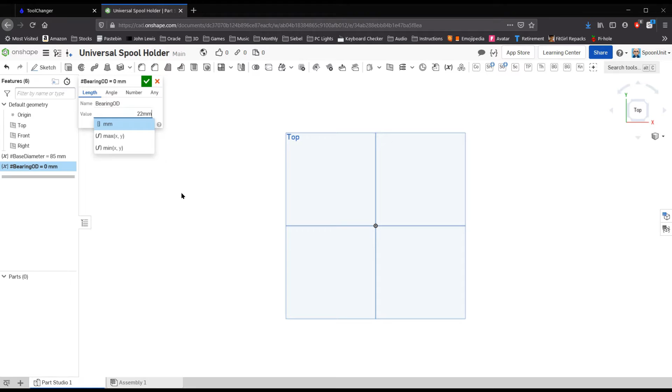And pretty much everything else should flow from that. Let's see how we get on.

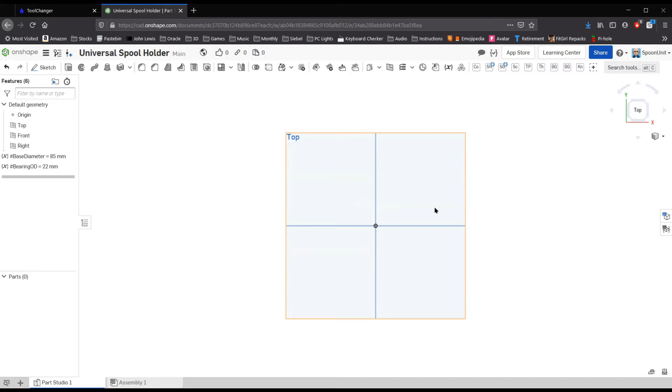Okay, so the first thing I've done is rotate the model, the 3D space, so that we're looking at the top. I can click on the top, press N to normalize to be looking directly down on the top. I'm going to create a sketch here in the top plane, and we'll start by creating a circle.

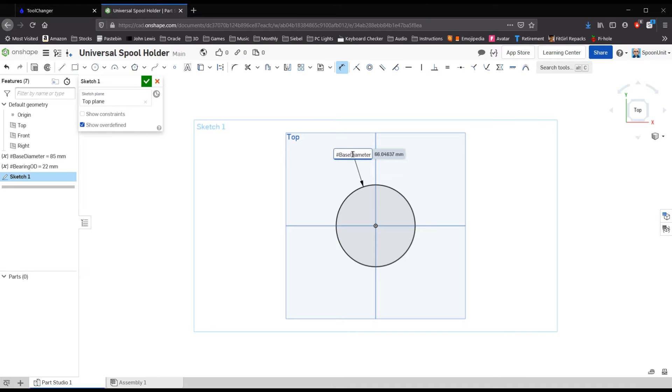I'm going to type in for that - in fact, I'm going to pick up the dimension, click to make this a dimension, and make this to be a variable, and I'm going to pick the base diameter. Okay, so now that gives me something which is 85 millimeters in size.

And what you'll see here is that if I change that size, if I increase it, using the arrow keys, this thing will actually grow. It's very easy to adjust that size at any stage in the design, or later if you print out this design and figure out that it's not quite right.

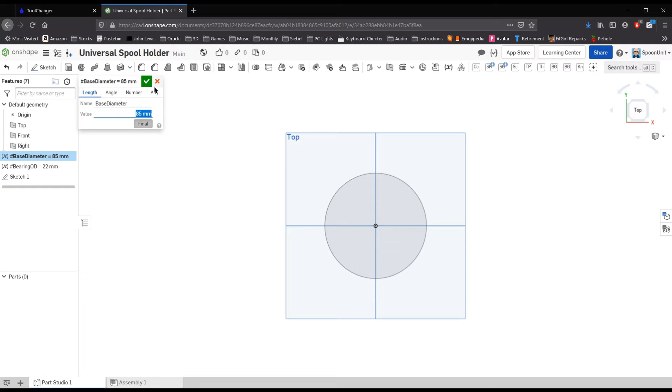I'm also going to have a slight - what's the word for it? We're going to extrude this circle and then chamfer the edge of it in order to give us a profile which can fit multiple spool sizes.

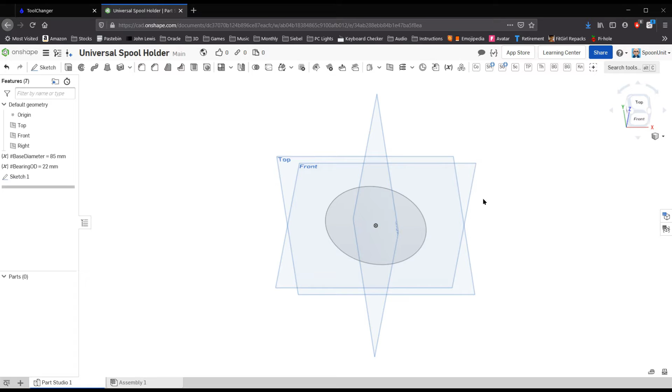So I'm going to pick that sketch, and use the extrude tool, and we'll just start by extruding this, say 15 millimeters. You'll see what I'm doing in a minute with this.

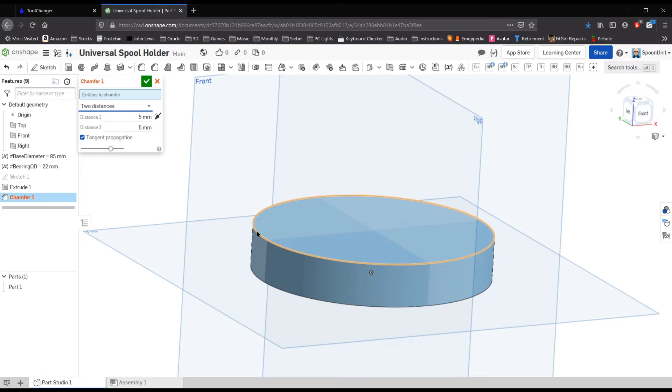I'm then going to shave some of the top off this using the chamfer tool, just to give it a bit of a nice look, essentially. We can do two different distances here. So I'm going to chamfer this edge, and right now that's just using 5 each. We can again use the arrow keys to increase the numbers until we get the sort of design that we're looking for.

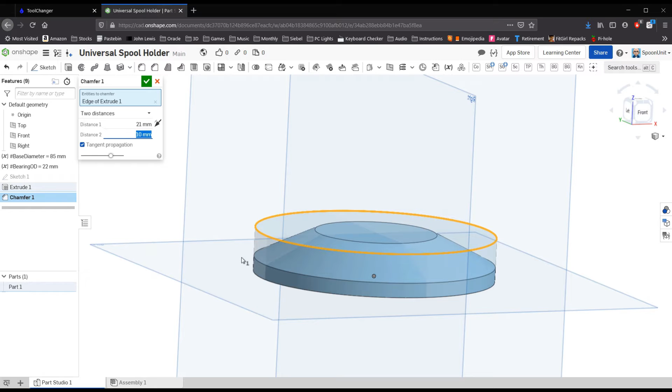We can tweak this a bit further at a later stage. Let's go for something like that, and then I'm going to create an additional chamfer on the edge, just to make it look nice. So we'll chamfer this, create again two different distances, and we'll go for something like that, say.

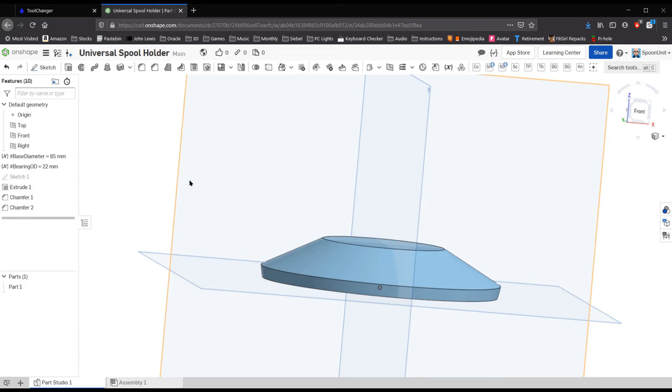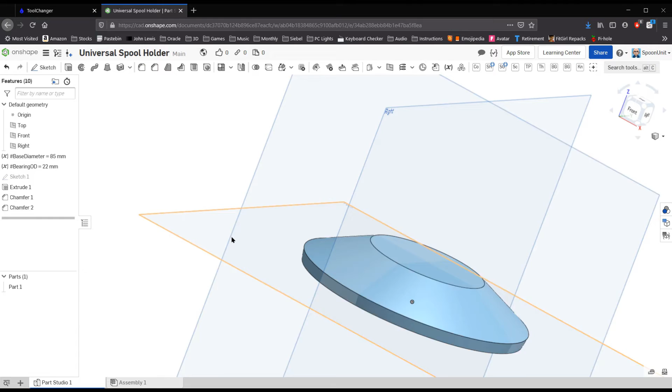So that just gives us something to hold on to, and which will allow us to screw this in until it fits on the inner diameter or the outer diameter of the hole inside the center of the spool. I could model that as well, but I'll forget that for a minute.

Okay, so from here then, the next thing we need to think about - I'm going to click this surface and create a sketch on there. The next thing to think about is the fact that we're going to have a bearing. Now most bearings, as I say, we use a skateboard bearing, that's 22 millimeters.

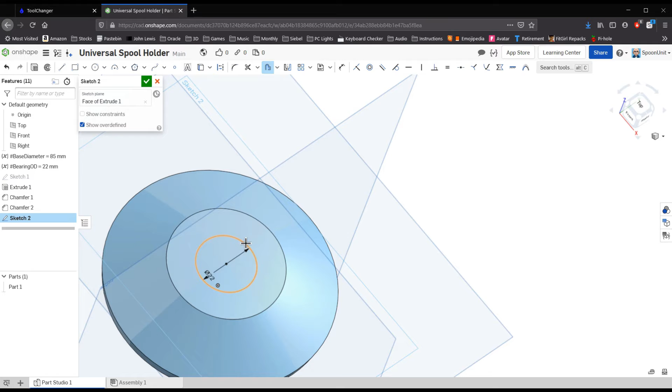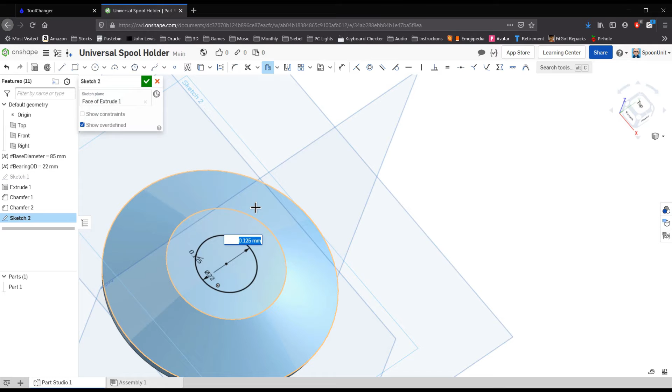I'm going to add a bit of size to this using this offset tool, because if it's 22 millimeters, I don't want to make it exactly 22 millimeters, or when it prints it won't quite fit. So I'm going to add 0.15, or let's say 0.125 all the way around, just to allow the bearing to be easily inserted.

As I say, if I make it 22, I'll probably end up having to get sandpaper and square it away. I've found through experience that you need to make the hole a little bit bigger than the thing you're trying to fit. I generally recommend 0.3 if you want something to fit inside, but we want quite a tight fit, so I'm going to go for 0.25, and if I add 0.125 each side, that's going to give me my 0.25.

Hopefully that wasn't too difficult to follow.

On top of that we're going to create some extra offset in order to create a rod that we could thread. So on top of that, let's say we add 3 mil.

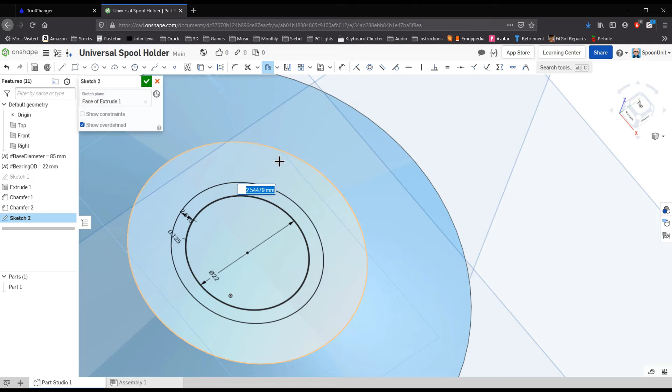And then I'm going to take this and we're going to extrude this. Now the question is, how thick is my spool? Bear in mind, the spool is not going to touch this base here. It's going to touch somewhere along here depending upon the size of the spool. So thinking about that is going to control how much we need to extrude this.

I'm going to say 100 mil. You can adjust this again.

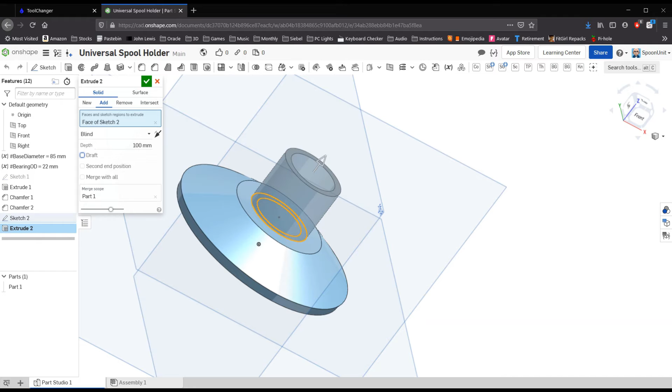There's another thing that we could actually create a variable for, called reel width. Let's say I'm going to put that one as 100 mil. If I move this variable up, then I'll be able to use that here. So instead of saying 100 mil, I can change that to hash reel width.

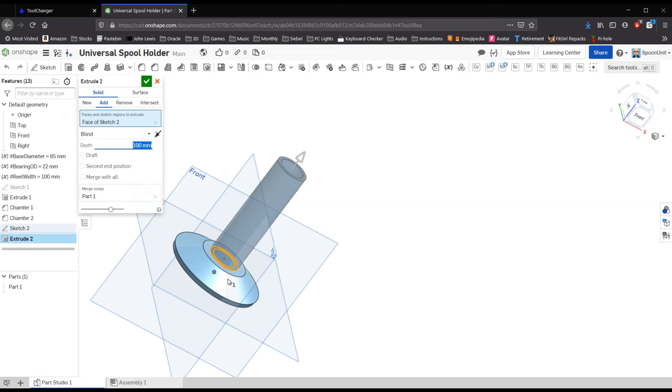Now, if I want to adjust my design, I can make this shorter or longer. Very easy to do. Take that back up to 100.

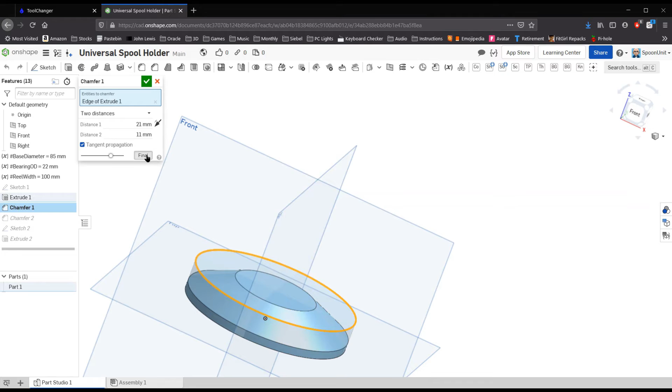You can see now we could adjust that chamfer a little bit further here to butt this up to that edge.

And at some point it's going to get difficult to make that. That looks as if that's about spot on.

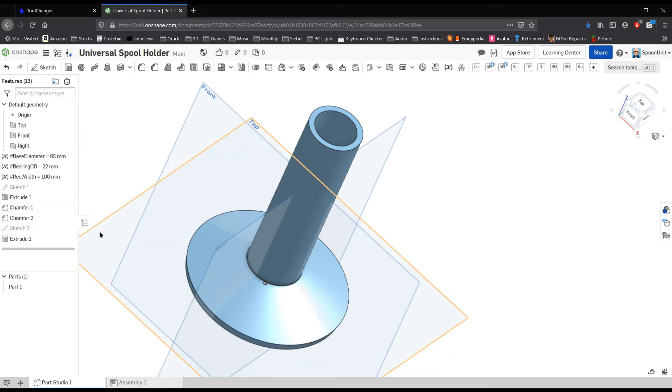So the next thing we want to do is add a thread to this. Now you can do that from first principles, or you can pick up some tools.

You can add some custom features here, and search for thread. We'll probably find a threading feature.

There are a few different ones that different people have designed. I've already picked one here, called Thread Creator. I'm going to click that, and it asks which face to thread — it's this outside edge that I want to thread. So I just click that cylinder and it will thread it for me.

Just takes a moment. This is all being done in the cloud somewhere on Onshape's servers. Not being very quick at all. I wonder why.

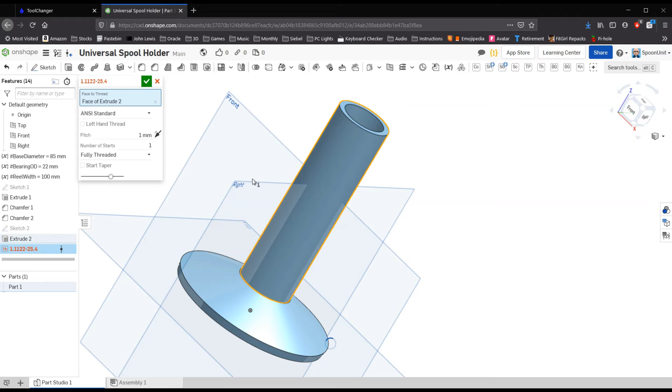Okay, there you go. You can see we've got our thread, and that's just too fine. We don't need a thread that fine. It would take forever to wind our bolt or our nut onto this bolt.

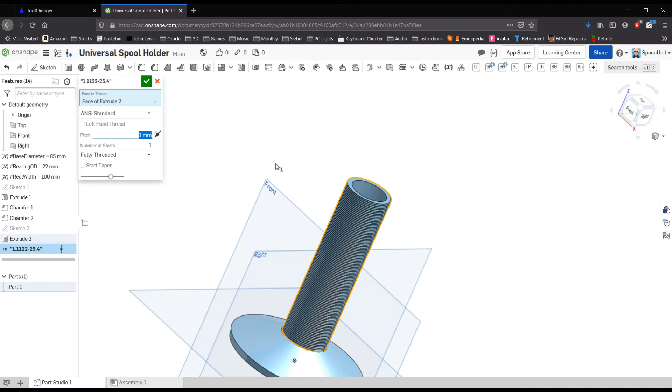So I'm actually going to change the pitch to 4mm, and that will then change this to be something that'll be a bit easier to use and a bit easier to print.

You could even change this further. We could go for 8, for example, but as you can see, that's had an unexpected effect where it's actually created a requirement to make the thread that has got rid of the interior, which is definitely not what we want.

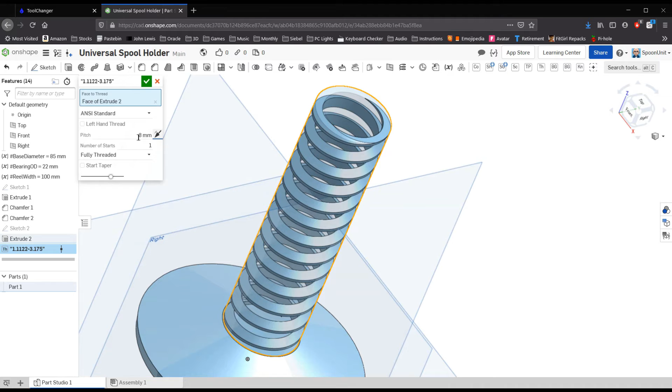What about if we did 6? No, 6 is no good. 5? Yep, 5 would allow us to keep the interior, but it's probably extremely thin between these inner parts and this.

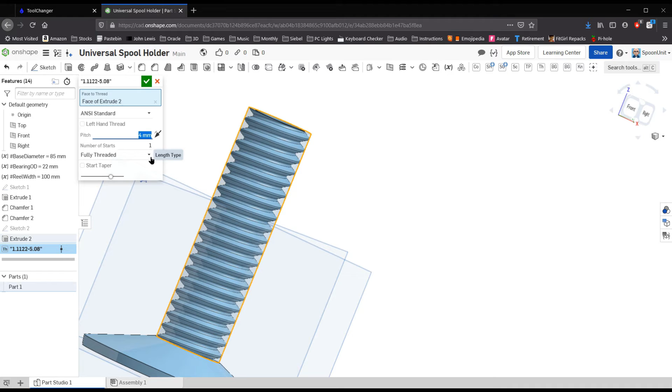So we'd have to again adjust our design if we wanted even larger threads. I'll stick that back to 4, as I'm pretty sure that'll work well.

We could increase the number of starts here as well. That would again adjust the design somewhat and would make it probably do up rather quicker.

I'll just leave it at 1. You can play with that if you want.

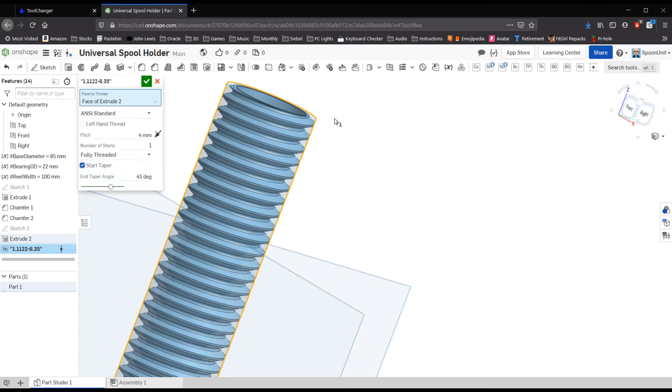The other thing we can do here, which is interesting, is a start taper. Now you can see here that's just had an effect at the top, and that can also make it easier to actually thread this thing.

I've used a 45-degree angle. Let's change this to 60. And let's just cut a little bit further off the top of that, and that'll make it even easier to push in.

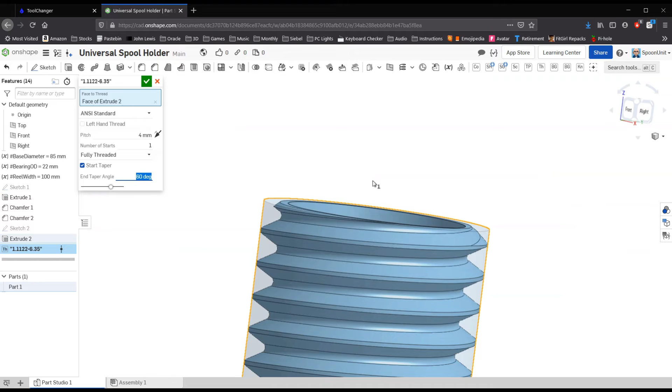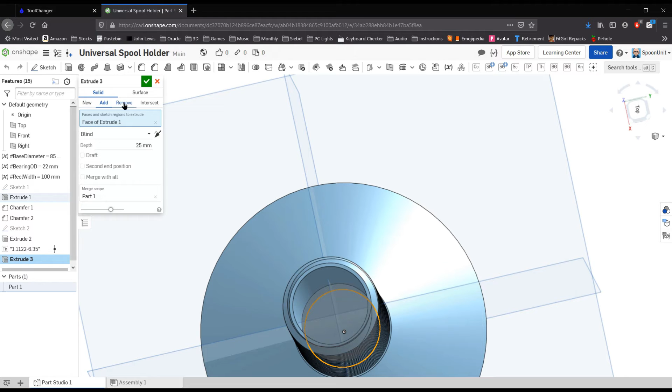Okay, so that's that part. It should be easy to push our bearing in. Now you can see we've got a little problem here. We're not going to be able to get our bearing in the bottom. So what I'm going to do here is just select that hole at the bottom, and we'll extrude, but a remove sort of extrude instead of an additive extrude. Click OK, and that's it. We've now got a hole in the bottom.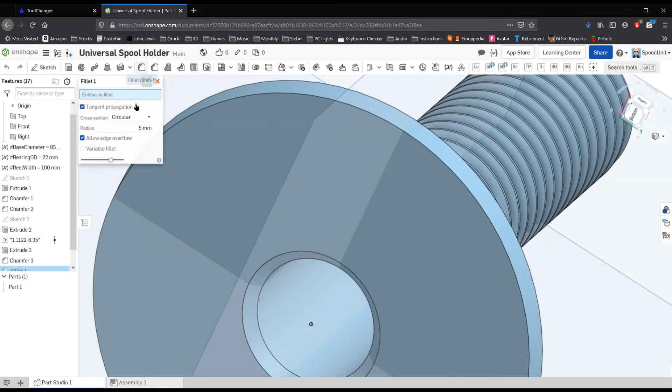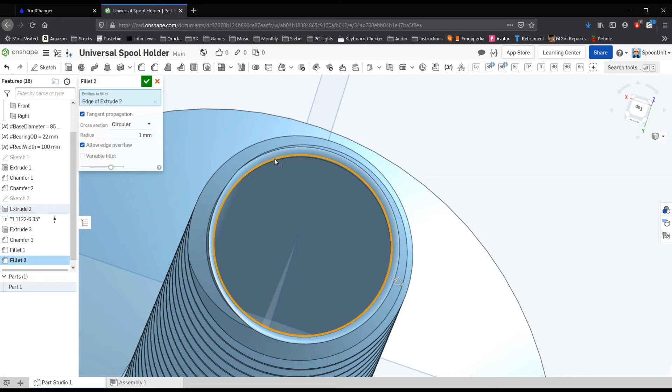And again, if we just modify that, I'm going to add, say, 2mm chamfer in here. That'll make it a little bit easier. And in fact, on top of that, I think I'm going to add a 5mm fillet, just to allow us to push in our bearing relatively easily. We could do that at the top too, but I suspect we're going to begin to have a bit of trouble if we start filleting this. I'll just try adding a 1mm fillet here. Oh yeah, it will let me do that.

Right. Okay, so we've got all that parameterized modeling in. We can just modify any of this now to adjust any of this. So if we want to change that base diameter, I can click on this, look at my final model, and I'm going to increase that base, and it will just adapt the whole model for that adjusted base size. If I want to make it 100, no problem.

Easy. You can see some of the modeling doesn't quite follow exactly. We'd have to go and adjust some of the chamfering. You can go a bit crazy with adding variables, but this will still work nicely. I think we originally had that at 85, so let's go back to where we were.

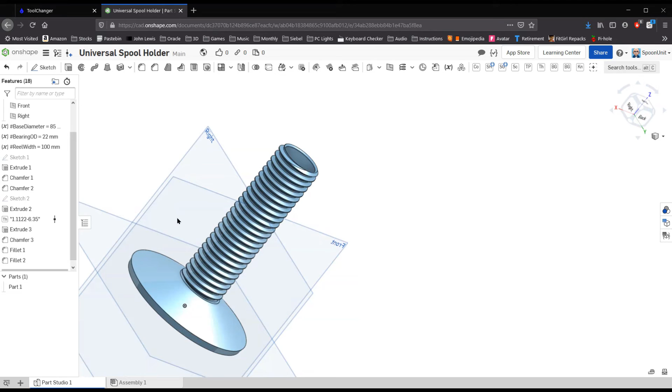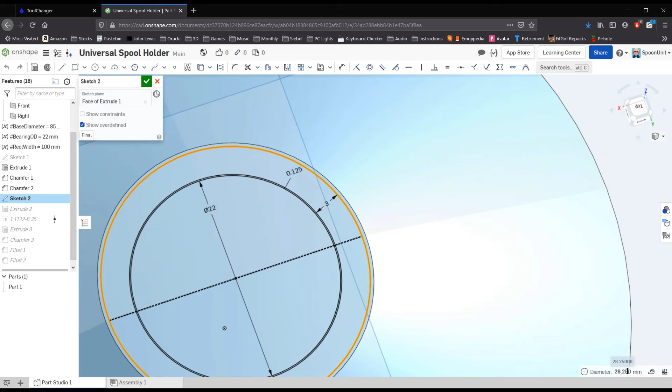Okay, so that's the one side of the puzzle. Now we need to solve the other side of the puzzle. And before we get started with that, I'm going to come back to my sketch where we defined what the outer diameter would finally be of our thread. So if I click here, we can see it tells us that the final diameter outside was 28.25.

So we will want our nut to be 29.25 or 29.75 in order to give it a bit of an easy time threading on. If we make it the same size, again, the nature of printing is that the numbers aren't always accurate and you need a bit of freedom to rotate your nut on the bolt.

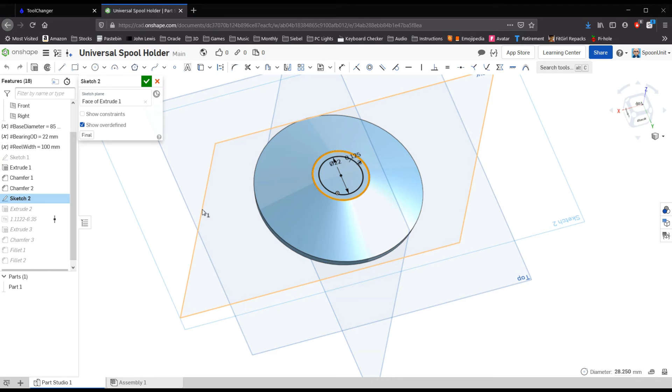So our size would be 28.25. We actually could have calculated that too from here, given that we knew what we would add to it. The 22 plus the 0.125 plus the 3. Well, actually that would have been 22 plus 2 times 3 plus 2 times 0.125 in order to get all the way to the outer diameter. Could have all been parameterized, but that's going too far.

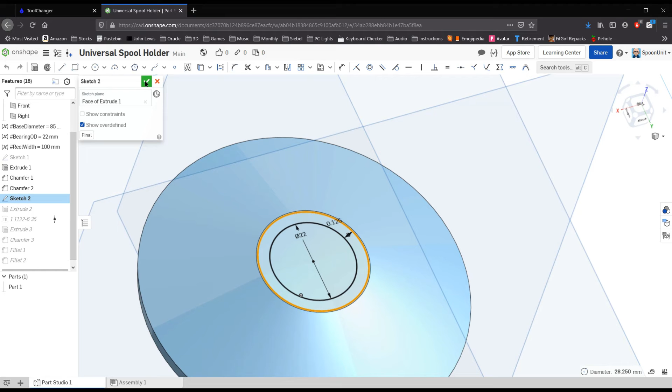Okay, so let's say we're going to add 1.5 mil of free space, so we need to create our second piece. Now we can do that in a new part studio. It's the easiest way to do it, really. So that's our bolt. Let's rename that to bolt, and we'll rename our new part to nut.

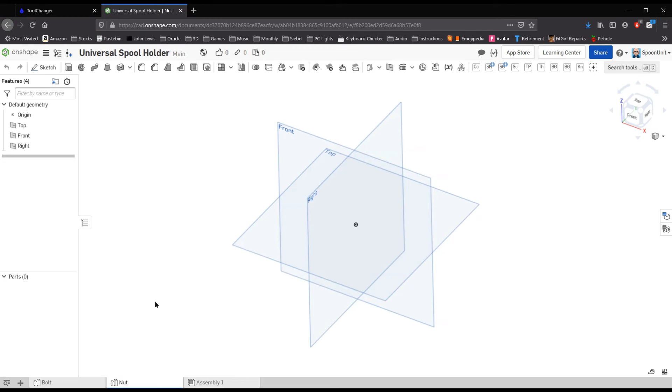Okay, now nut's going to be designed pretty similar. We'll start by clicking the top plane, and we'll create a sketch, bearing in mind some of those numbers that we were just using. We want this thing to look roughly like the original one, so I'll bring across the base diameter. I'll have to recreate that here. So let's call this base diameter, and we'll make this 85 mil again.

And we've got the OD of the main pipe of the thread. As I said, I'm going to make this 29.75, something that should fit nice and easily.

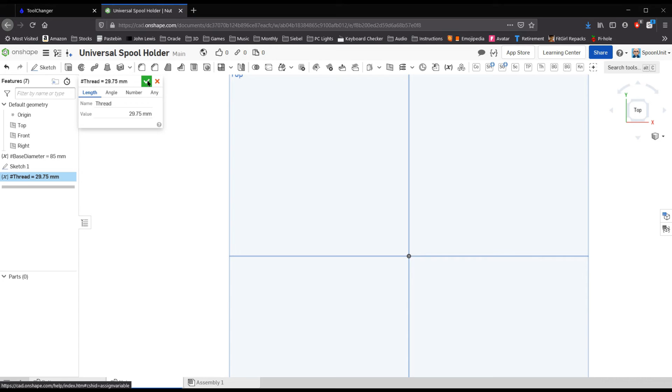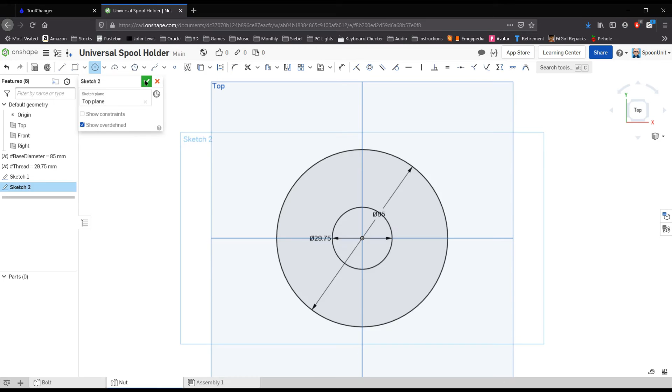Okay, so now we're going to create a sketch on the top plane. We'll start again by creating a circle and making this #base diameter size. Then we'll create our hole, and I'm going to make this #thread. And then I kind of want to mimic what I did at the other end.

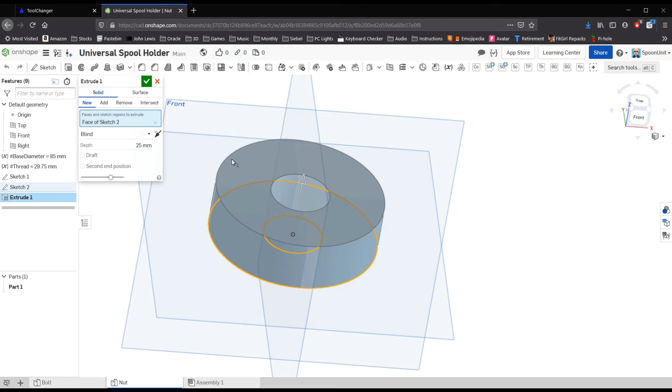I could have taken alternative steps here to be able to copy this thing through, but let's just have a look again what we did. We extruded it 15, and then we did a chamfer with 28 and 11, something like that. So we're going to extrude this. Now I've got a hole already in it this time because of the way that I've designed it. 15, and we'll put our chamfer.

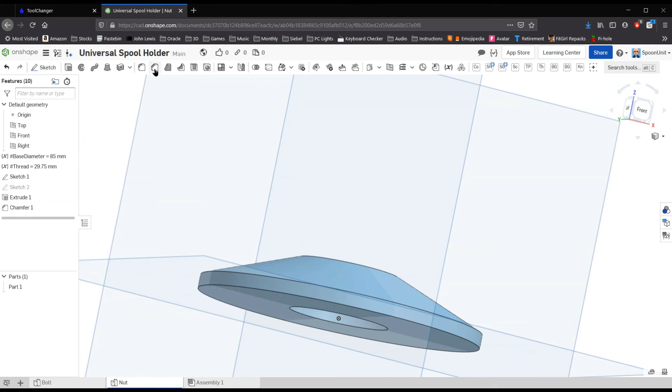Oops, that's the wrong one. Two distances, 28, 11. Okay, we also created a small chamfer here as well. Might as well have it look the same at both ends. This was 5 and 1.

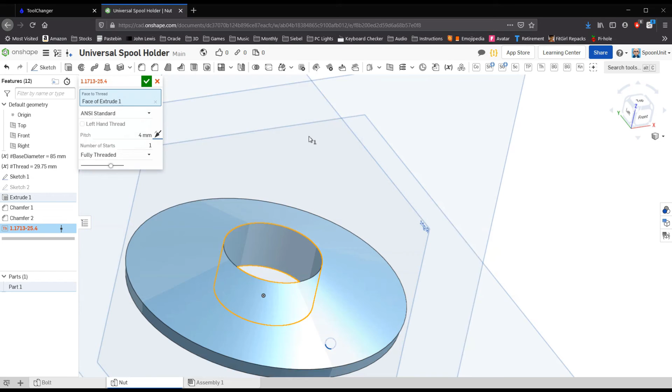And we're just going to create a thread on that inner face. We need to make sure it's the same pitch. So I'm going to put 4 in there. Okay.

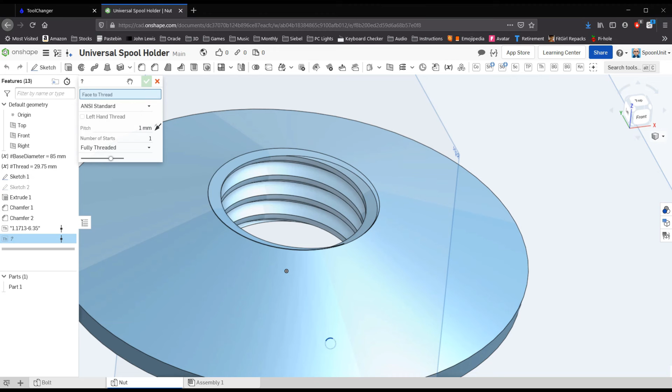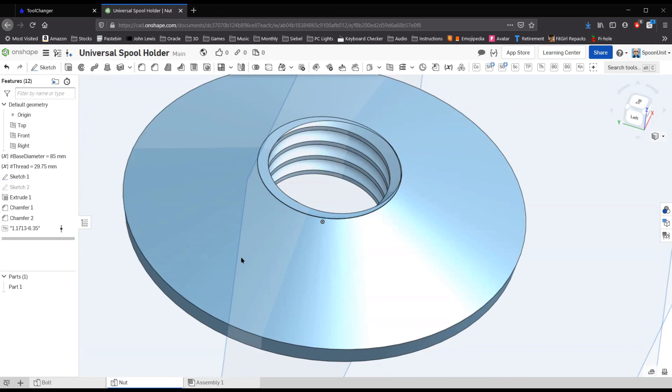Yeah. Okay, so that's our thread. Now, as you can see, well, actually you can't see, but again, experience tells me, even though we've added that chamfer at the top of the thread, it'll be easier if we create a bit of a hole here as well. I'll do that in a minute. The other thing is, it'll just be easier to do this up if we again modify our initial sketch a touch.

I seem to have accidentally created 2 sketches here. Yeah, so let's bring this back. Okay, I'm just going to put a line either side of this so that it doesn't extrude quite so much. Pick any size point you like. I'm not going to be too precise about this. I'm going to mirror this. I don't know where to mirror it actually. Okay, let's not mirror it yet.

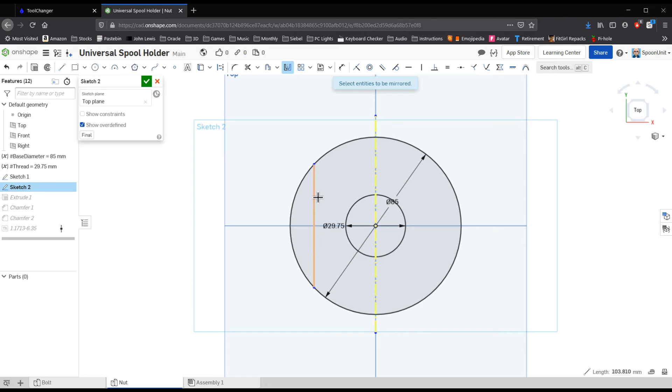Let's create another line here. I'm going to create this line as a construction, so it's not actually doing anything. It'll be right on the center, and then I'm going to mirror, using that construction, this. That puts it exactly on the other side. So when that's extruded now, it'll look like this.

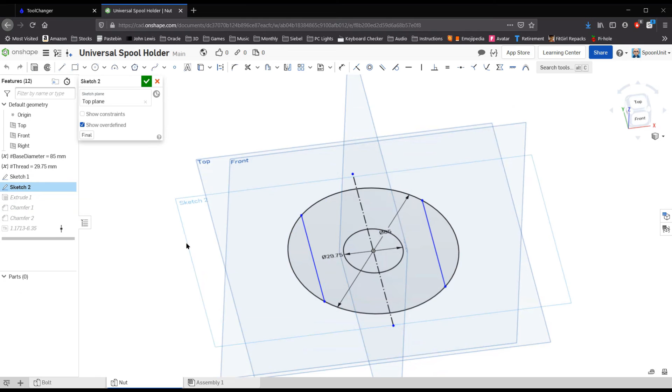Not quite what I had in mind. Not at all. I suspect the problem there. Yeah. Okay, well that's obviously not going to be so cool if we do that. So let's do it a different way. Let's come back to my extrude, and I will extrude these extra parts initially to create this, but then at the end I'm going to come back to this.

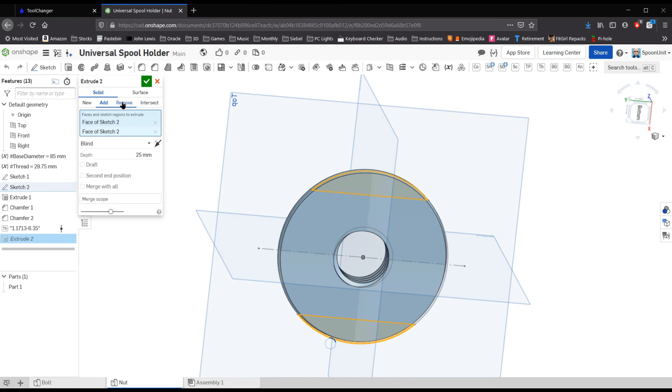Let's re-show this sketch, and I'll pick these 2 outer edges and I'm going to extrude and remove those, but they need to go the other way. Okay, now I've got what I want. Cool. Okay, yeah, so about threading this on. In order to thread this on, we also need to remove a bit of material here to make this easy to use.

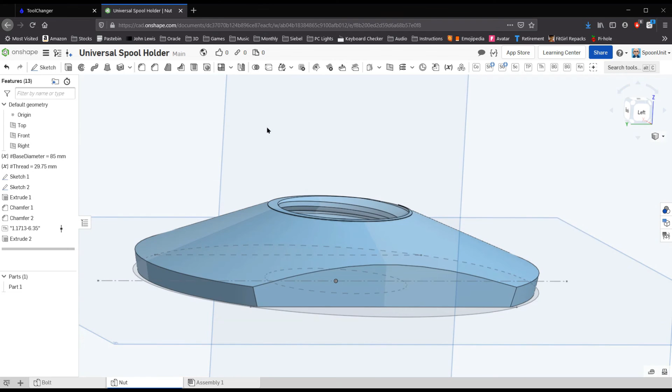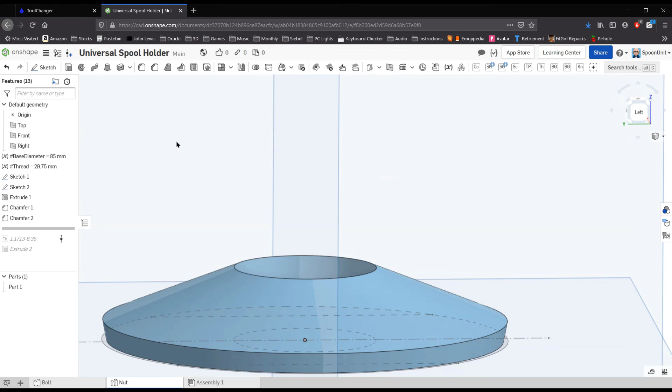So, the way to do this is to step to a point before the threading occurred. So I'm going to right click on this and say roll to here. That'll roll forward the design to the point where the threading started. So just before we create the thread, I'm going to create myself a new little tool. Okay, so I'm going to create a new little tool here then on the right plane. So we'll draw a new sketch here,

and I'm going to start by projecting onto this plane. Actually, let's make that a projection. Let's use Control Z to step back a little bit, and I'll make this a construction and project that forward. So it doesn't have any bearing on the sketch, but it is present. I can use its size as a guide.

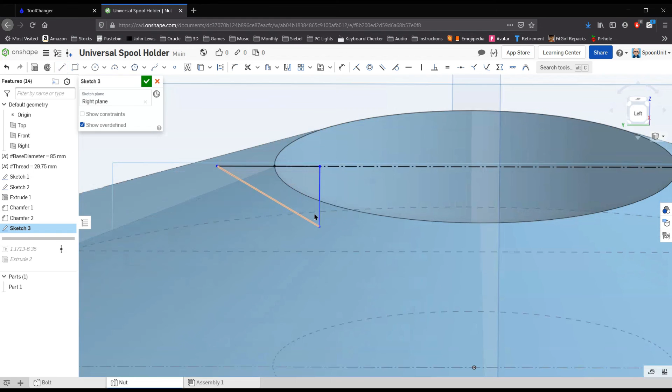Okay, so what I'm going to do then is I'm going to create a... If I pick up this point here and then go along from it, you can see this construction line appears, this yellow line, so it creates something precisely on that point. So I'm going to click from here to here, and then down to here, and come back to here. Okay, now this will create me a triangle. You'll see why I want that triangle in a moment.

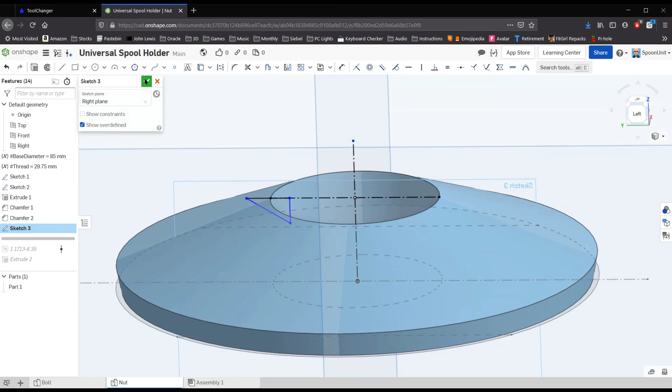I'm also going to create a new construction line which will give me an axis, and the reason I need all of that is because I'm going to take this design here and I'm going to revolve this around this axis. Okay, so that gives me a piece. Now, rather than adding that to this, it's just going to be a tool that I'm creating.

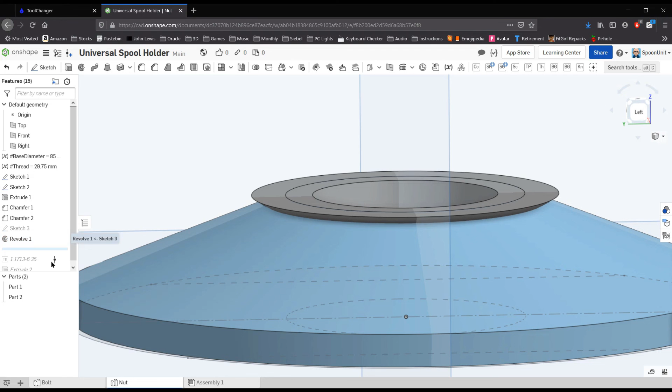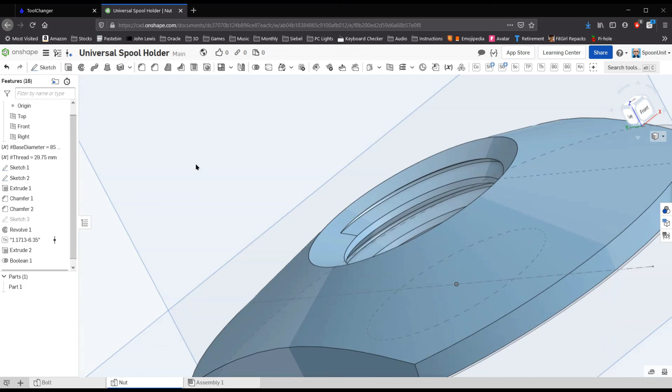Okay, and what we'll do now is roll to the end, and then I'm going to perform a Boolean operation to subtract this tool from this target, and that creates me that nice easy entryway, which makes it easy to thread. And there you have it. Okay, so we can finally just piece these two things together if we like. Insert the nut and the bolt.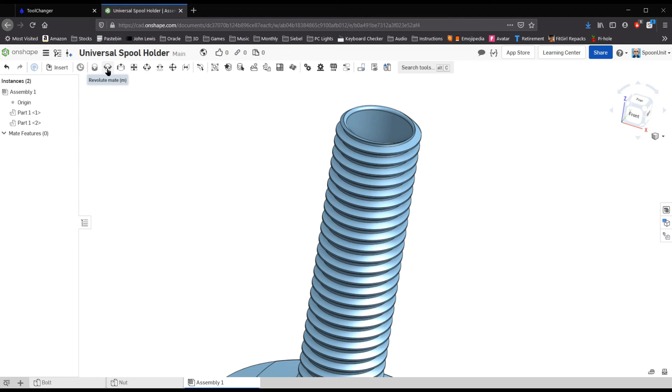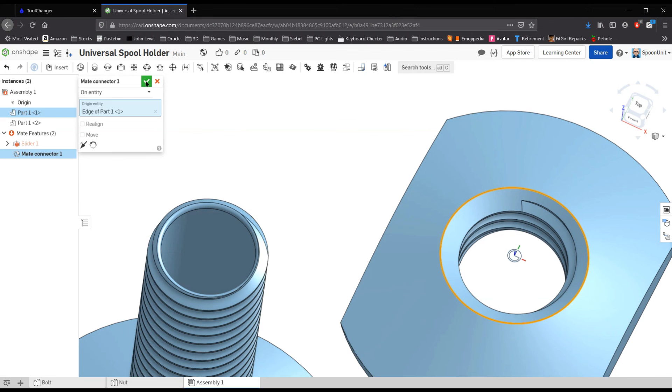If we just want to sort of see how this thing will work, I would create a cylindrical mate. I think you can actually create threaded mates here. A revolute mate. Let's just put this as a slider mate. So I'm going to create a center mate connector there. I'll just move this out of the way, and I'll create a new mate connector in the center of that, and then I'll... okay, let's delete that.

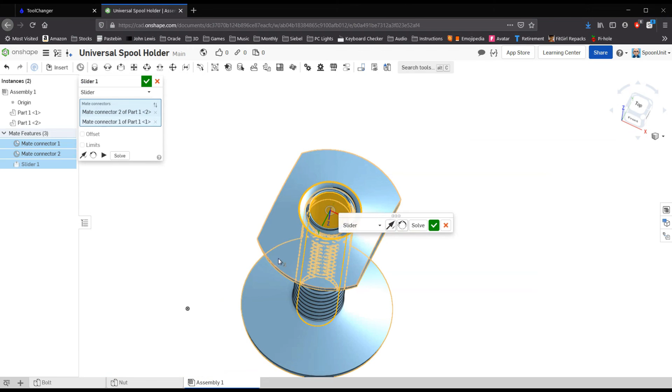Okay, we need to create the mate, and then I will create this slider mate. I think this is how this works. So that to that, and we want it the other way up. Okay, there we go. So that's roughly how this thing will work. This thing will go up there. We'll have our reel captured in the middle, and we're done.